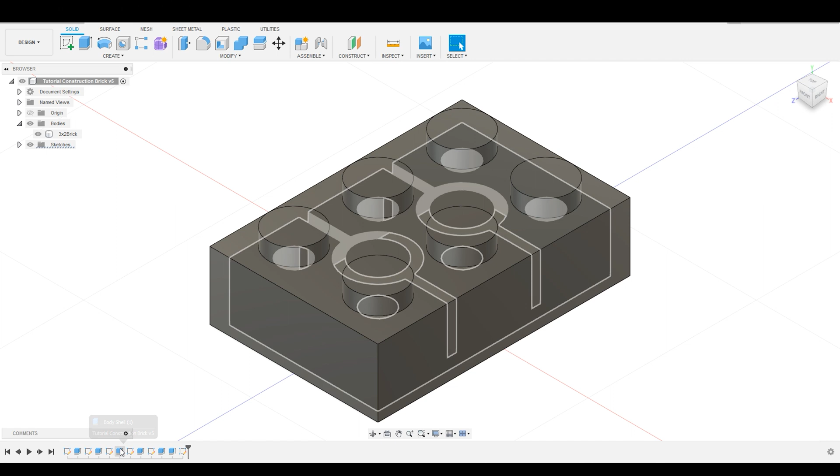Now, before we dive in, there is one thing that I did off screen that I want to tell you about, which is go through and name the features on the timeline. So you can see as I hover over them, they do light up in the workspace, but they also now have a name: body shell, peg, guts. It doesn't really matter what you name them, but especially as this timeline starts to get longer and longer, it is really helpful to go through and name your parts. So as you start to scrub back and forth and you're adding features and you're changing features, it makes your life a lot easier. Now, let's dive in.

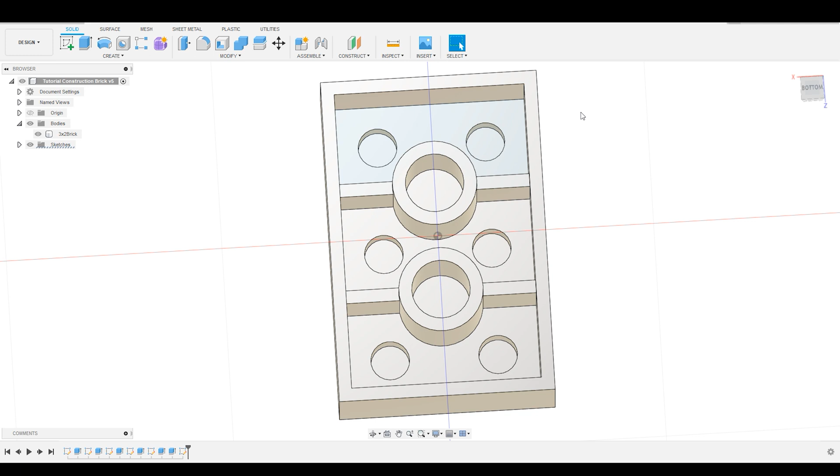So when we last left off, we had created the primary geometry of our brick, and we had added some extrusion ribs to help support the interior and to connect to the pegs. There are a few additional ribs that you would see traditionally on a construction brick perimeter to hold those pegs together. We did not model them yet. We could have modeled them in the same sketch, but there's some new things that I want to show you here. So let's create a new sketch, and it's going to be right there.

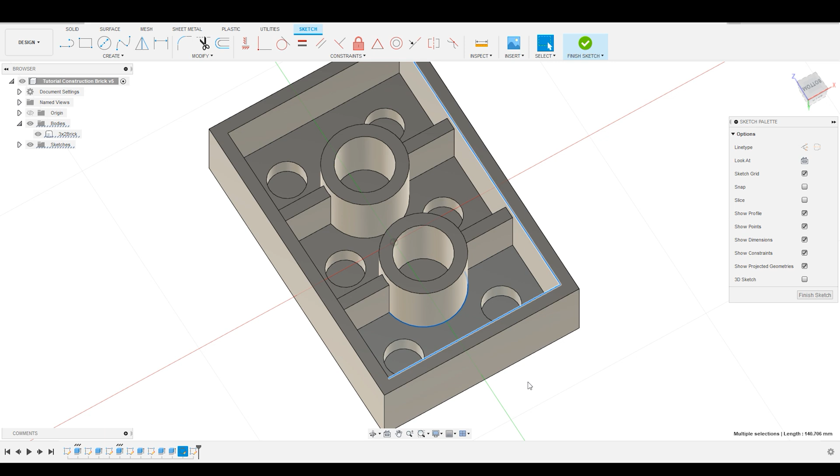Now, that is going to snap us to the bottom plane where we're sketching, and we want to pull a little bit of reference geometry. So hold down the shift key, middle mouse click to rotate. I'm going to grab this edge, and this circle. Actually, I don't want to grab that circle. Let's grab the interior circle. And then I'm also going to grab from this side the two pegs. Now this is, like I said, a little bit repetitive because we've already done a lot of this work, but go here and project, and hit OK.

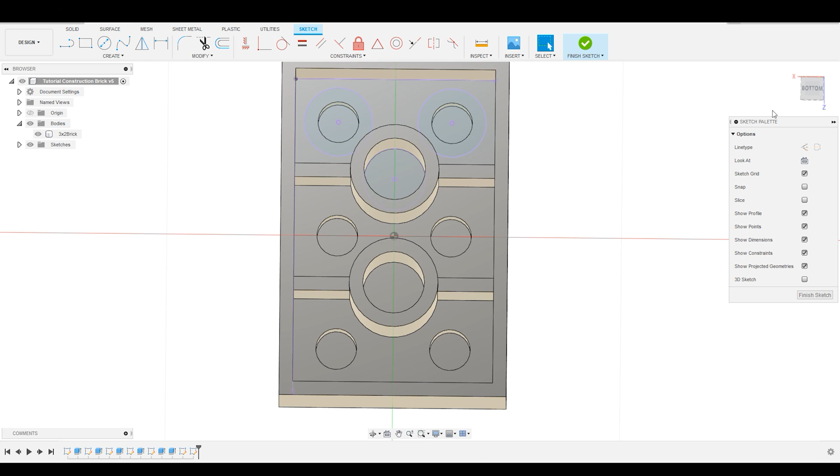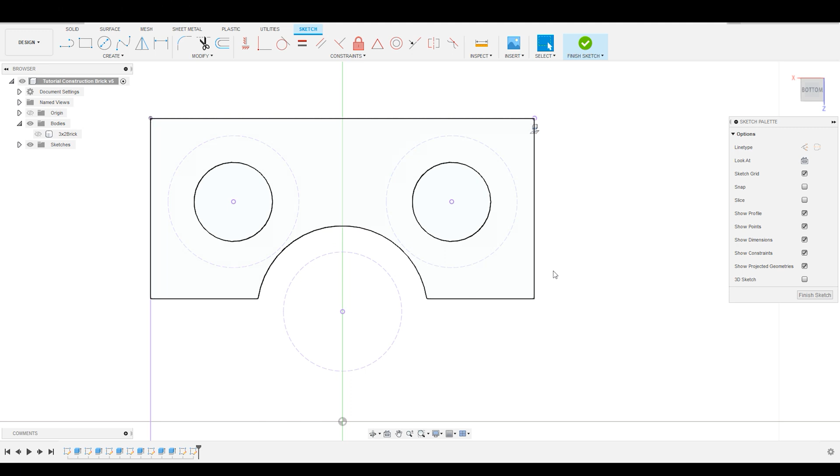Now we're going to go to the bottom to square everything up and zoom in, turn off the body so it makes everything a little bit more visible, and we are good to go. Okay, now let's go ahead and select all of this stuff, and we are going to turn it into construction geometry because we're not actually going to be using it for any type of modeling purposes. And let's start drawing in those corner ribs.

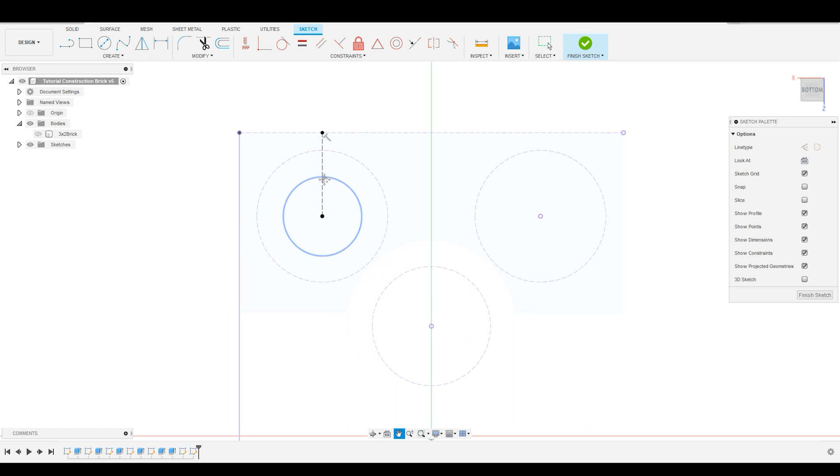So thinking about how we can constrain things geometrically before we constrain them dimensionally, I know that the ribs are going to be coming from the center of this circle. So first thing I'm going to do is draw a line straight up from the center of the circle, snap it to the top and hit escape to leave that tool. Switch this to construction geometry. I'm going to zoom in a little bit just to make sure that we're focused.

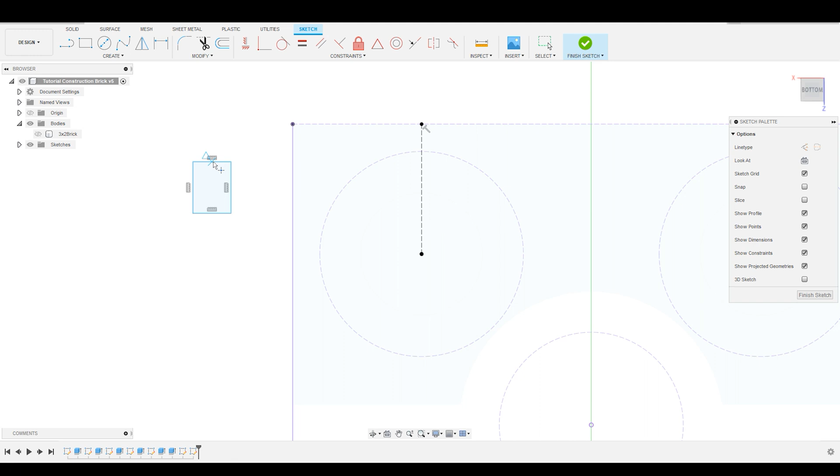Okay, next thing I'm going to do is create my rib. I'm going to do that with a rectangle. And what do I know about this rectangle? Well, I know that the top edge is going to be constrained to this line, and I know that it is going to be centered along this vertical. So the easiest way, I think, to do that in a single constraint is to add a midpoint to this top edge, hit escape, and then constrain that midpoint to this endpoint, hit coincident constraint, and now they are snapped together.

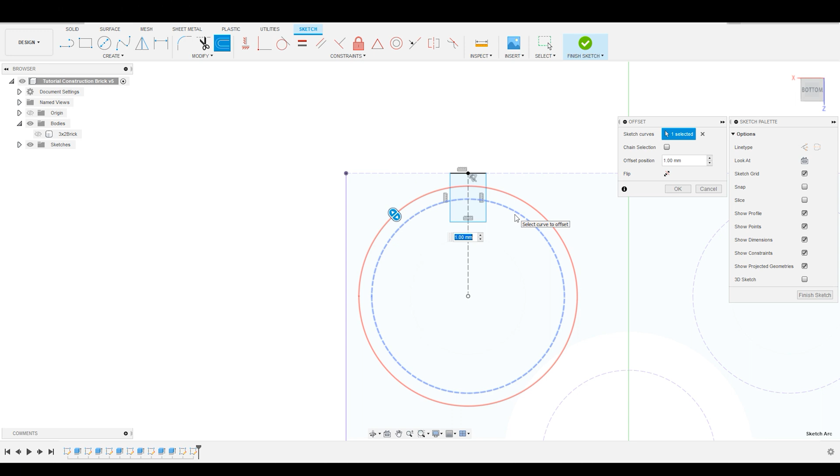The next thing that I'm going to do is create an offset circle around this peg. Similar to the big center peg here, remember we need to create some type of tolerances for our 3D printer or our CNC machine or whatever it might be. So I think I used 0.3 as my interference fit tolerance. Hit escape, convert that to construction geometry. And now, what do I want to do here?

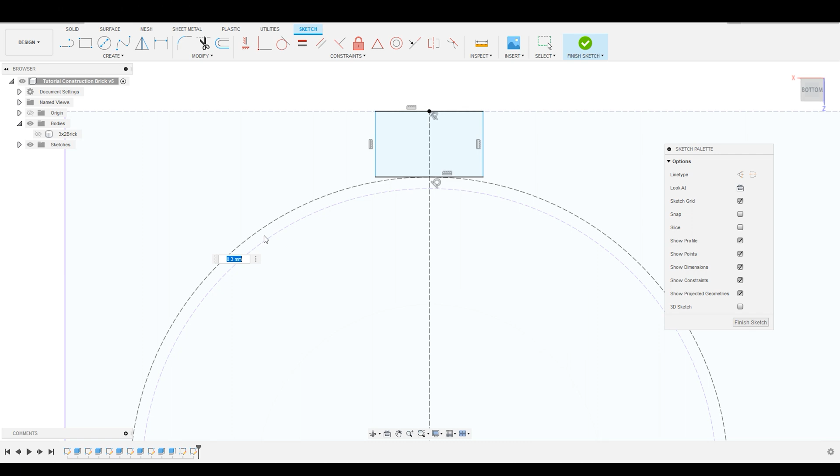Well, now I can use that tangent command to constrain this edge of the rectangle to this circle. So I can select both of those, hit tangent, and now you can see that this is tangentially constrained to the top. And the benefit of that is that if I were to go back and change that tolerance, let's say my bricks were fitting together too tight or too loosely, I can change this and it will automatically adjust. I'll do it a little bit bigger just so you can really see it. Okay, let's go back to 0.3.

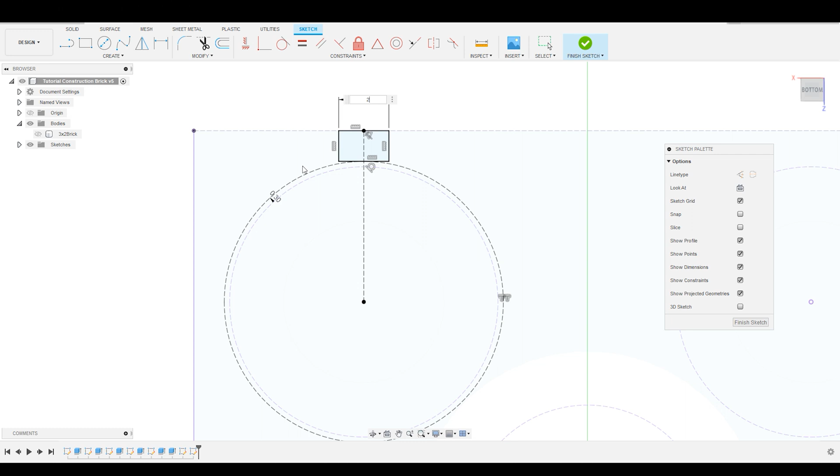Now we just need to constrain the width of this, and we are going to do that with the dimension. So only one dimensional constraint and 3 geometric constraints here. So let's do 2.5, looks good. I don't know what the official is, but this thing is pretty big anyway.

Okay, now we have one rectangle. So again, thinking about geometry, what do we know? Well, we know that it is going to be around the perimeter of this circle. So how could I mirror this? Instead of creating the geometry again, how could I mirror it?

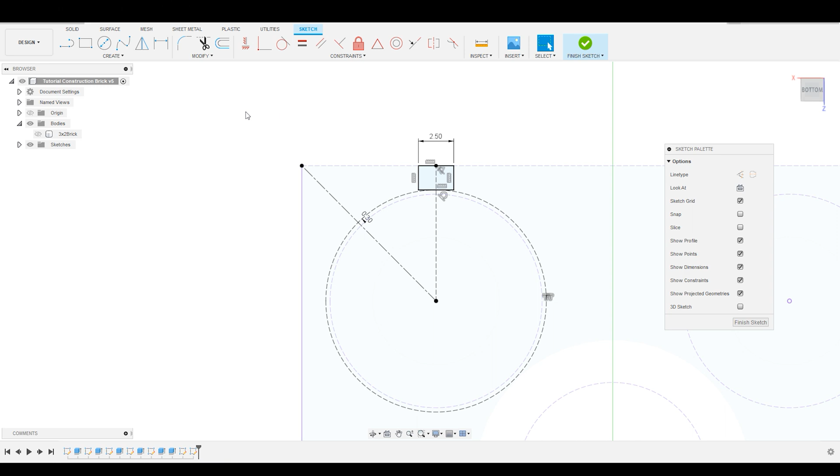Well, I know that if I were to set this line at a 45-degree angle, so coming out from the center at a 45, convert this to a mirror line, I could actually mirror across this. Now that's new. We haven't done that before. So far we've only been mirroring across verticals or horizontals, but you don't have to. You can set this mirror line at any angle and it will mirror across it.

So watch, if I hit the mirror tool, and now I select my object, you can see because this is the only center line in the sketch, it's already selected it. All right, and hit OK. Now, you can see I've got a rectangle here of the same dimensions.

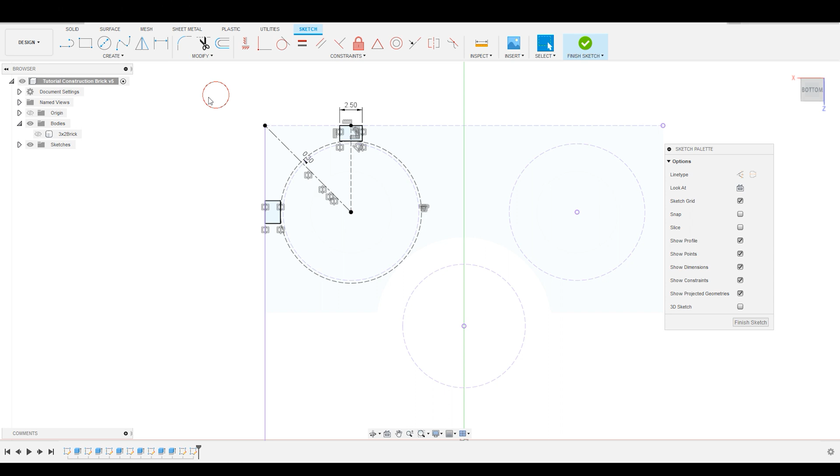Okay, why did I add this to my sketch? Well, it's because I want to show you a different type of patterning, similar to the mirror tool, but not exactly the same, and that is the circular pattern tool. So if I think about this brick, I know that I have 4 pegs. I'm going to turn this off for a second just so you can see it. I know that I have 4 pegs around this circle.

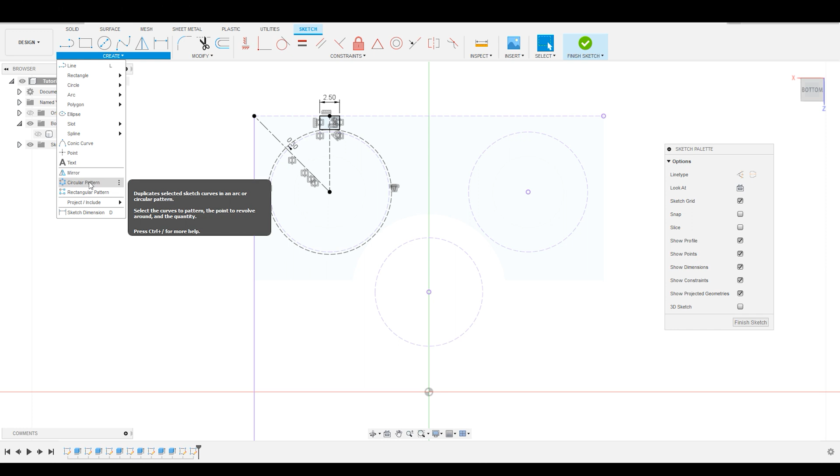So rather than mirroring them along a straight line, I can pattern them around a circle, and I can create those pegs at all those corner locations. So let's turn this body back off, and let's create the circular pattern tool so you can see what it does. First, it's going to ask me to select the objects. So I'm going to select all of these peg bosses.

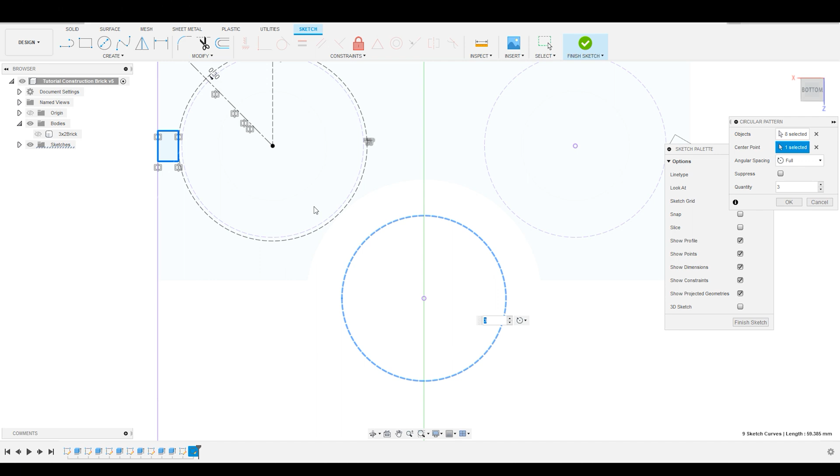Then I'm going to go to this. What is my center point? I can actually select a point or an arc. It will recognize either. And now it's going to bring up some additional circle pattern options. Okay, so the first thing it's going to ask me is my angular spacing. So do I want to go all the way around the circle, or do I want to go a certain distance? Maybe I want to do along an arc.

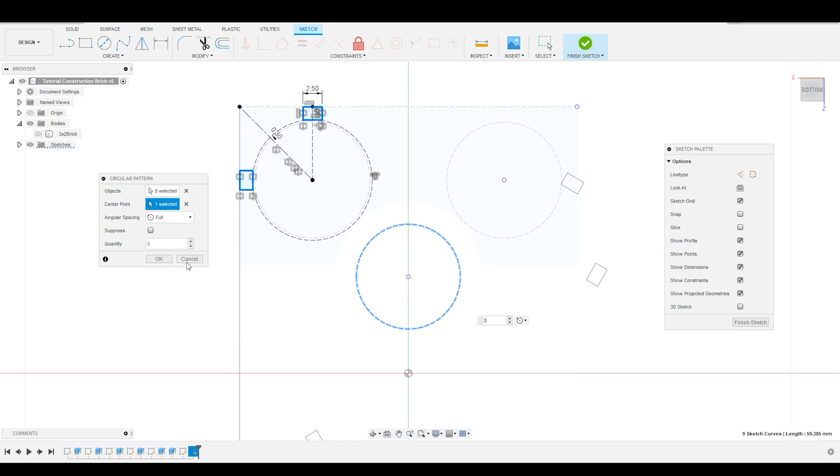I'm going to go with a full, and then it's going to ask me the quantity. Well, I want them at all 4 corners of this circle, so I'm going to click 4 and then hit OK. And as you can see, it has patterned this geometry around this circle. All right, and this is actually constrained, so I can repeat it, and I can also edit it. So if I needed more, I could add more. Not that I'm going to here, so I'm going to hit escape.

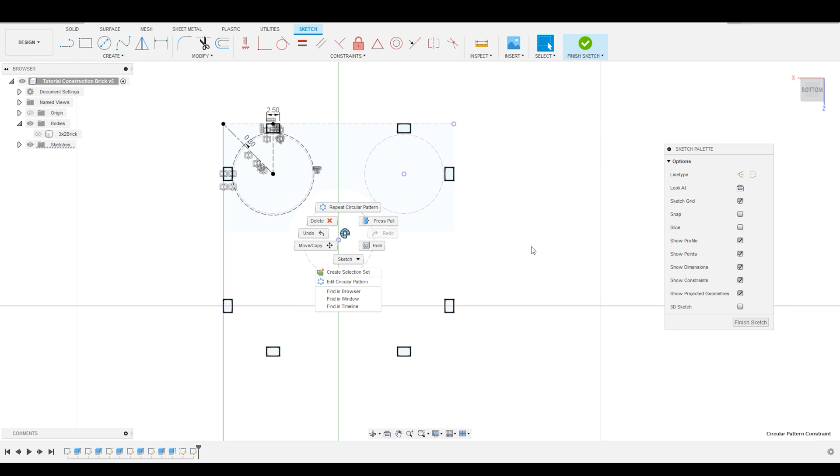But now you can see that I've got this pattern around the brick. So it will touch all of these pegs. Pretty cool, with only 2 little sketches. So using the mirror tool and the linear, and in this case it's called the rectangular pattern tool, but it works the same way, right? Really, really useful for quickly adding geometry to your sketches.

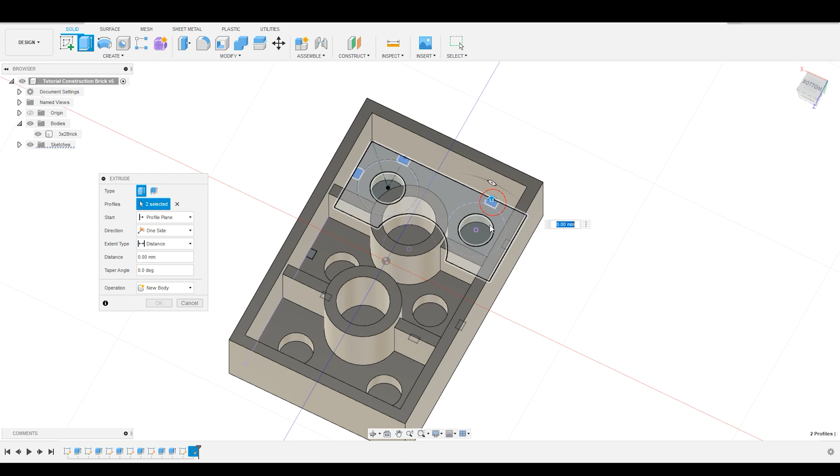Okay, and with that, we can finish this sketch and exit the view by holding down the Shift key, middle mouse key, and rotate. Okay, let's go ahead and extrude this. So hit extrude, and it's going to ask me for the profiles that I want to extrude. I'm going to get all of them. Okay, except these 2 over here. I actually don't need them. It was easier to have them in the pattern, but I don't actually need them all. So I'm going to ignore those.

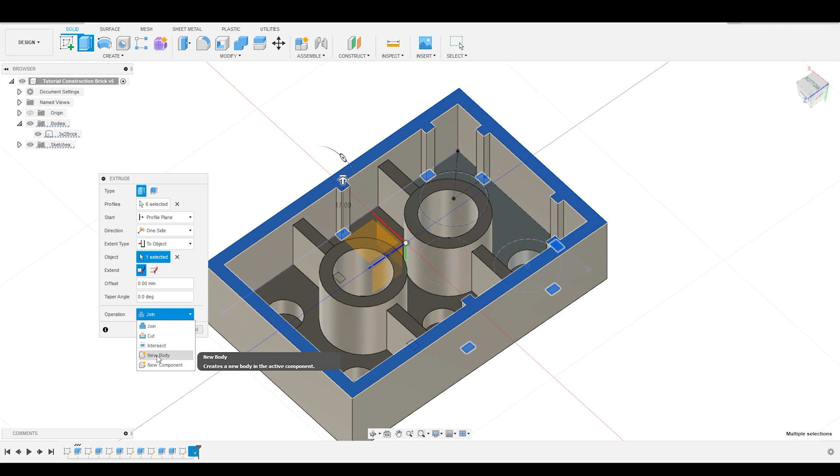Extent type is going to be set to object because I want them to come all the way up to this edge here. And there we go. Now, as long as we're doing this, I'm going to show you another tool. In this operation, rather than have it join to this body and become part of the main brick, we're going to go down here and select New Body and hit OK. And what you can see has happened is, in addition to the 3x2 brick body, we also have 6 other bodies.

All right, and it's kind of hard to see. So great, this is an opportunity to show you another tool. If I right-click on this body and go to Appearance, that is going to bring up the Appearance tab. And the Appearance tab is going to allow me to change what it looks like in the workspace. Down here, you can see there's a big library of materials that Fusion 360 has in as a default.

For something like this, I'm just going to use the plastics because I think that's pretty solid. And I'm going to pull up ABS (White), just the first one here. And I'm going to move it up to the design space. Now, by default, it is white, but by double clicking it, I can change some of the appearance properties, specifically the color. So I can come over here and I can drag the color slider over. Maybe I want it to be a nice bright green color.

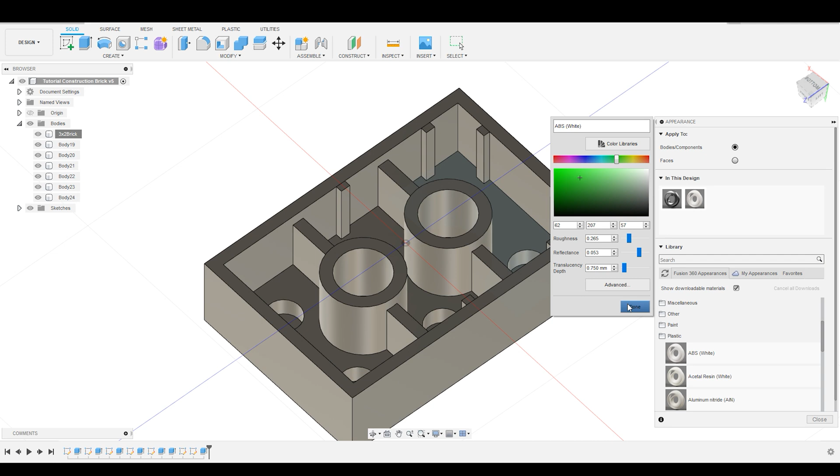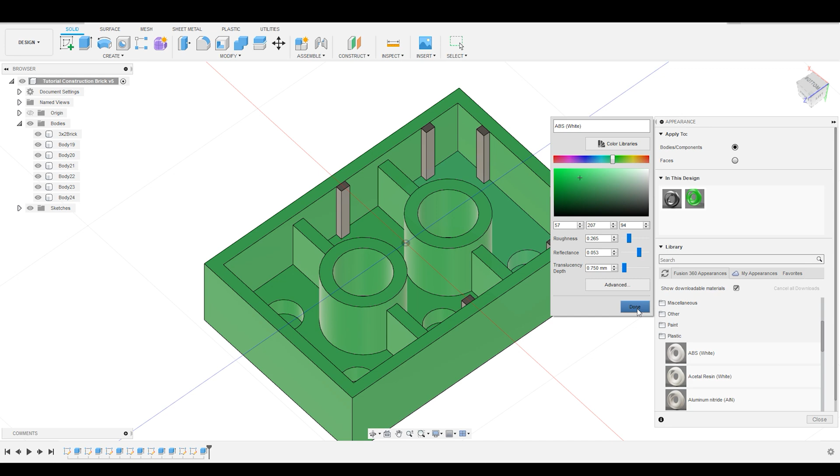And I can also change the roughness and the reflectance. That is not going to make a huge difference, in my opinion, in the day-to-day workspace. It makes a lot of difference if you are going through and rendering. So then I'm going to click Done. And then what I can do is I can drag this onto the body that I want to apply it to. You can see that the main 3x2 brick has turned green. That will update. So if I turn it to more of a blue color, it will turn blue. But we'll leave it green for now because I think that's a nice color. And hit Done.

Okay, now what we can do here, the reason that I wanted to keep those separate is because I wanted to show you how to do a mirror, not of a sketch entity, but of an actual body. So up here on the Create command in the dropdown, you can see we've got not only the Extrude command that we've used so far, but we can also mirror down here. So I'm going to click on mirror, and it's going to ask me what type of mirror I want to do. You can actually mirror a lot of different things: faces, features, features being like what we just did in extrude, so you can mirror that extrude to a different location. In this case, we're going to select bodies because these are separate bodies.

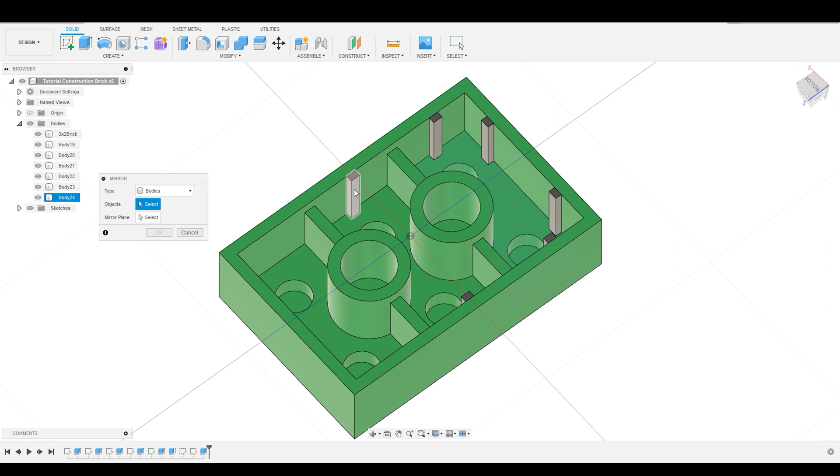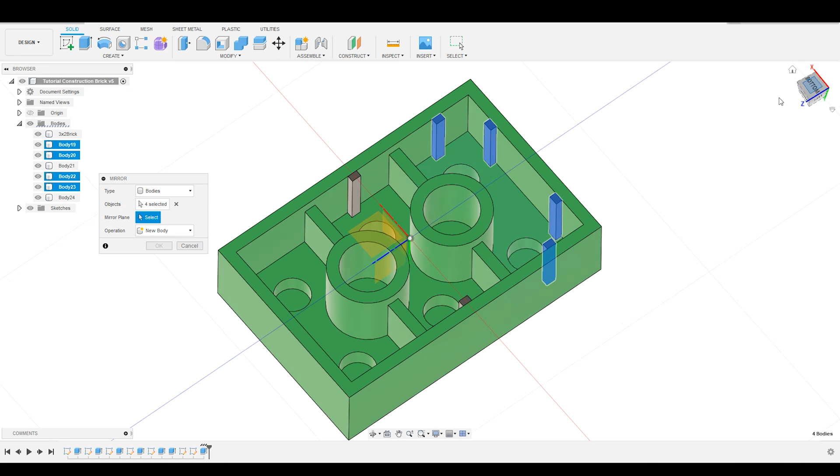And now it's going to ask me which objects I want to mirror. So I only want to mirror these 4 in the corner because I've already got one here and right here. I don't need them again. And next, it's going to ask me for my mirror plane. Let's pause here and think back to the very first sketch that we did. And what did we do? It was very important that we took the rectangle and we constrained it to the origin point here so that it was vertically and horizontally symmetric across the origin. Why is that helpful now? Because it's symmetric across the origin, I can use my primary reference planes as my mirror planes.

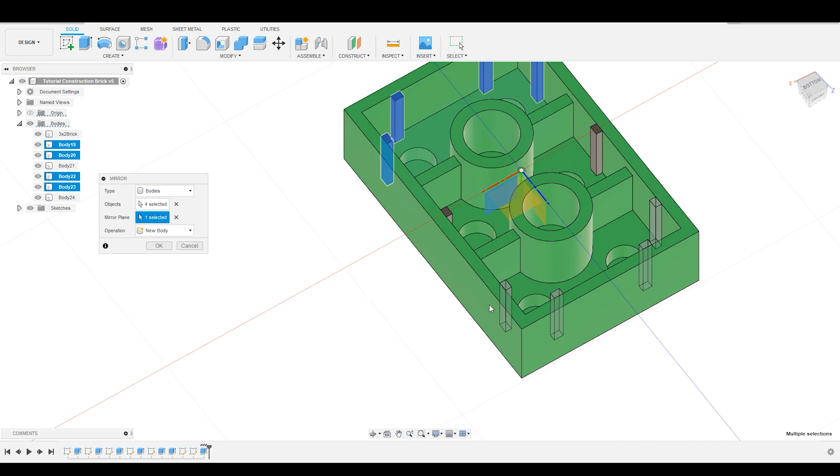So in this case, I'm going to use the XY plane to mirror across, and you can see that these ribs are now going to be mirrored to the opposite side, and it's guaranteed that they are going to touch this edge that I pulled from this sketch. And hit OK. Great.

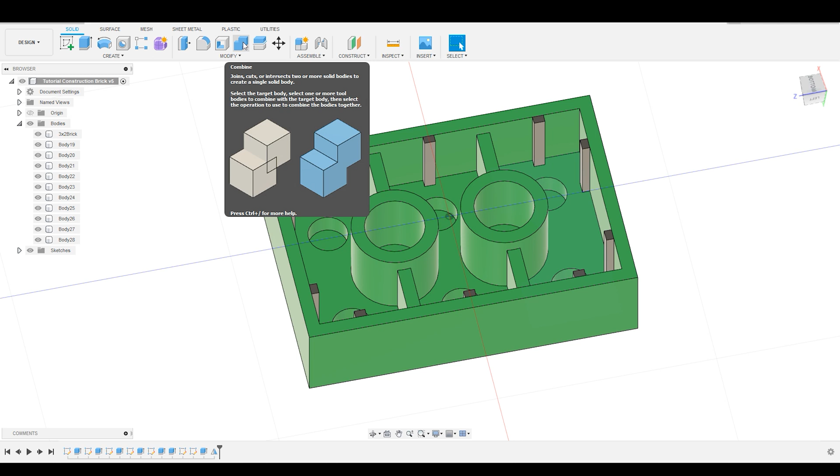Now that I've got all of my ribs laid out, I'm going to show you a new command called the Join command. So, or in this case, the Combine command. Different CAD programs are going to call it different things. Some of them call it a Boolean operation. Some of them have separate tools for combine, subtract, etc. But similar to how when we did an extrusion, we had the opportunity to join it to the main body, we can actually join separate bodies together after they've been created. So go up here and click Combine, and it's going to ask me the target body and the tool bodies.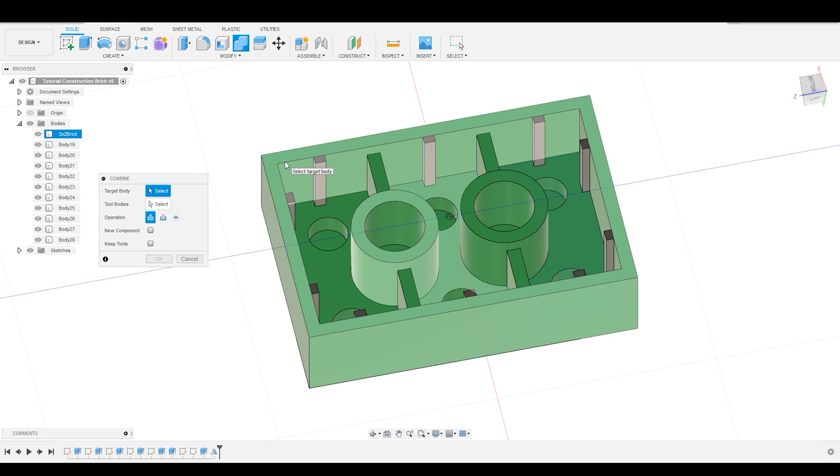Okay, so as you can see, one is singular, one is plural. The reason is that basically one is what you're going to use as the end result, the thing that you want to end up with, and then the tool bodies are the things that you're going to be using to get there. And that doesn't sound that important. It will make more sense when we start to subtract bodies. So I will show you this again. For joining, it doesn't really matter, but we're going to use the target body as our main body, and then our tool bodies are all of the ribs here at the corners.

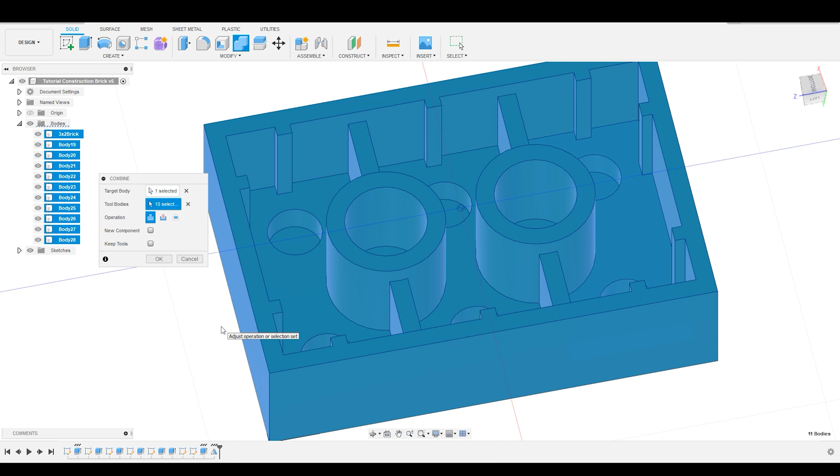And you can see that they change colors as they are joined, and also it loses the line over here. So we've got 9, one more to go. There's 10. One of the things it's going to ask me is whether I want a new component, and whether I want to keep the tools. If I don't keep the tools, they basically become merged with the original body. If I keep them, they're still going to be merged, but as a duplicate, so you'll still see all of these in the feature tree. I'm going to not check that, hit OK, because I want it condensed back down to that original 3x2 brick.

So we have a brick with all of our ribs around the corner. I think for today, we are done extruding, now that we've seen some of these additional options.

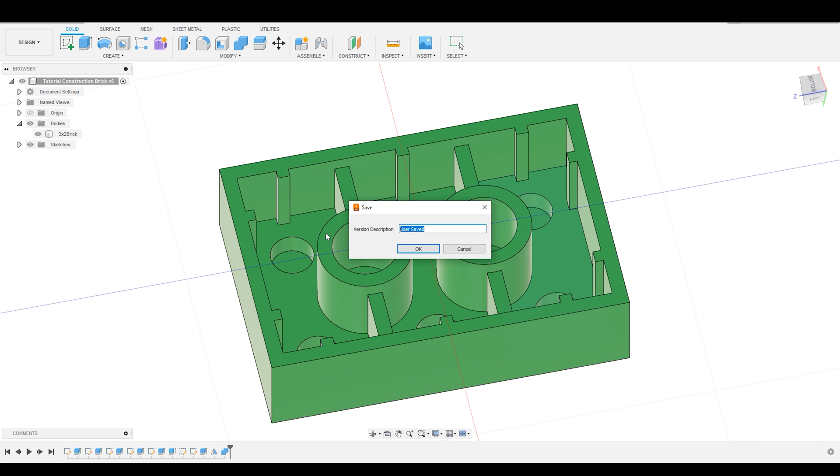So next up, let's start doing some additional modification, focusing here on the Fillet command. Oh, pause for a second—hit save, we have not saved in a while. We're going to call this V6 in my case. I'm going to have a lot more versions than you do because I've been doing these tutorials as a dry run and then going back and recording them. So you probably don't have that many saves, but maybe you do. Remember to save often.

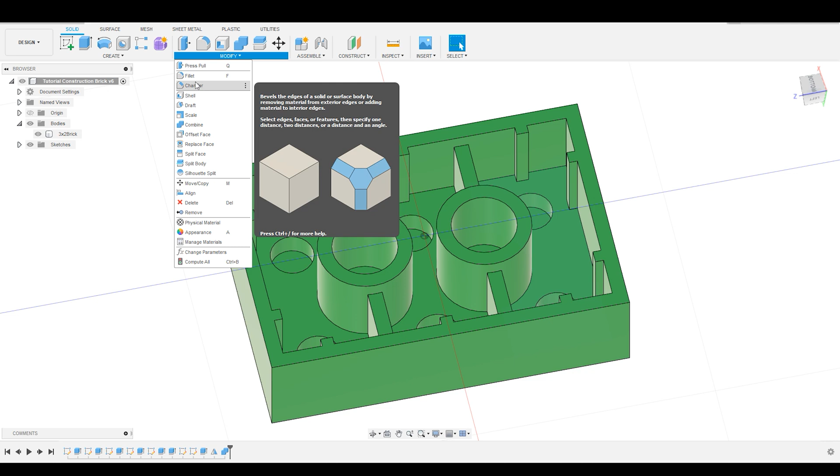Okay, now what we need to do is introduce the Fillet command and the Chamfer command. Some CAD programs will actually have them as part of the same tool, but with different options selected. In this case, they are separate tools. So you have the Fillet command, which is a rounded corner, and the Chamfer command, which is a hard angular corner that you can add to things. The first thing we're going to fillet is the edges of all of our ribs.

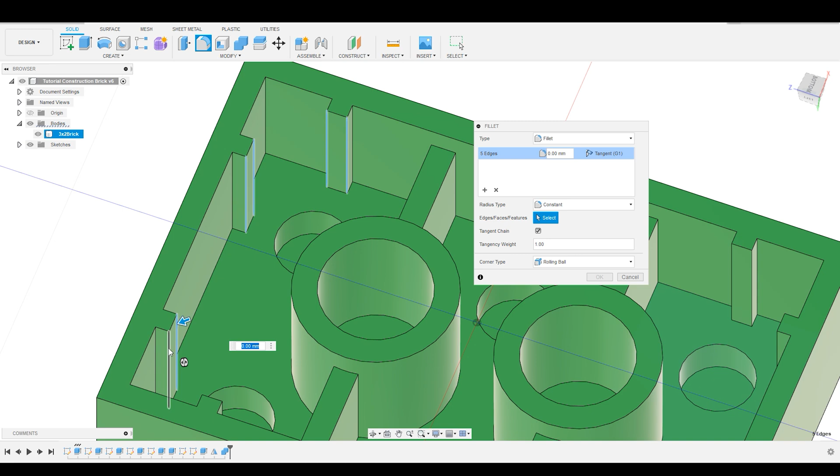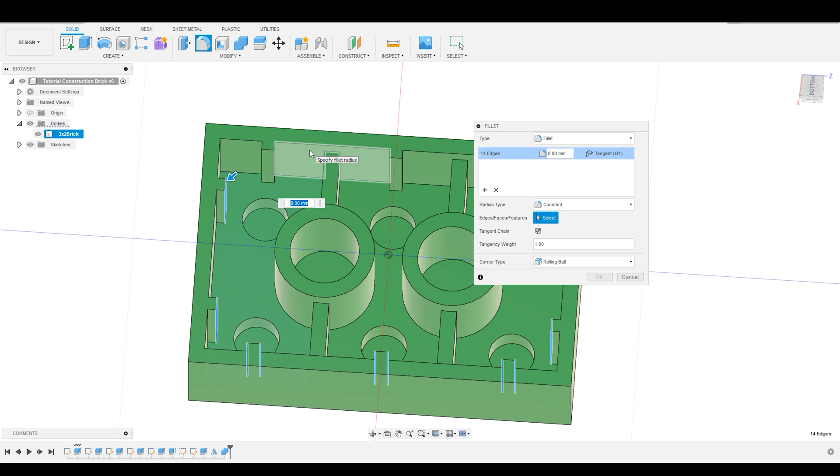When you select the Fillet command, it brings up the dialog box, and the first thing you do is start selecting the corners you want to fillet. You have two options: fillet a face or fillet a corner. I'd say 9 times out of 10, I select edges, because I want a little more control, and it's easier for me to visualize what's happening in the plane and space. There are definitely instances, especially working faster, where I'll just go ahead and fillet everything, but a lot of the time I'm filleting edges selectively. As you can see, as I select them, more edges are being added to the dialog here.

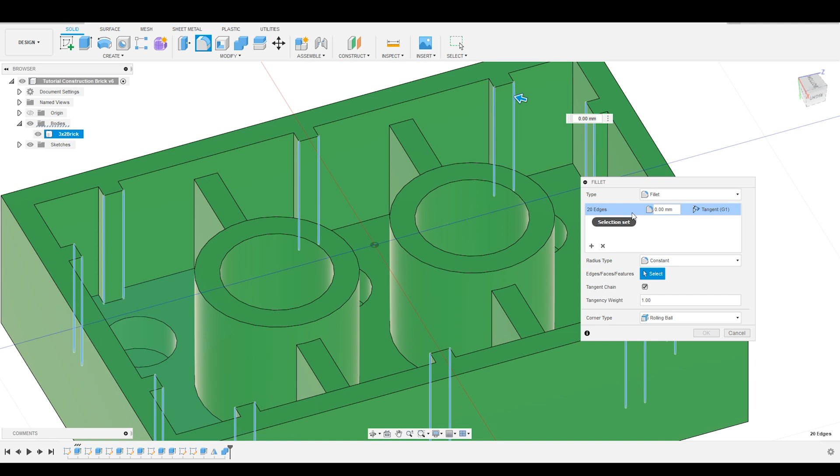Now the default value is set to 0, so you need to add some value. Let's start off with 1—just hit 1, and you can see it's created this rounded corner. Before you hit enter on this command, you can push and pull this to see what different sizes would look like. That's really cool, and you can adjust that on the fly. This handle—now I want to point out one thing, there are two different handles here.

One is the arrow, which lets you adjust the fillet radius itself. This one lets you change the tangency weight. We can talk about tangency weight at a different time—by default it's set to 1. We'll come back to that. There are reasons to change the tangency weight, but for a beginner tutorial you don't need to know anything about that. We're just focusing on the radius of the fillet.

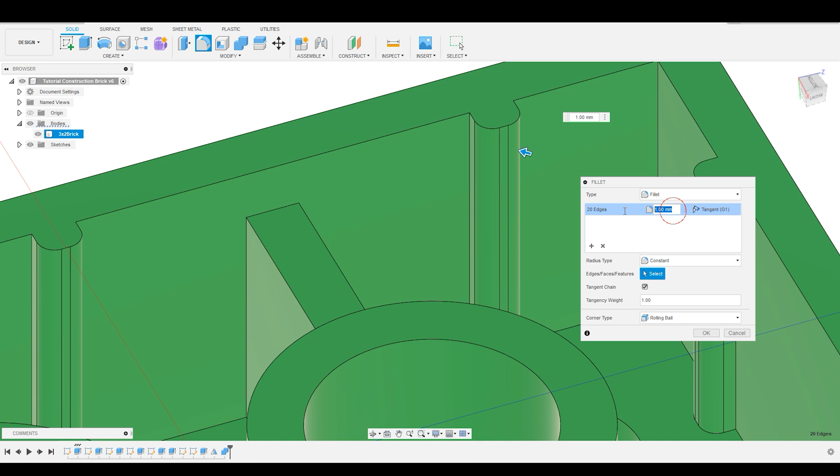So let's change that—we know this diameter, or distance, is 2.5. If we change the radius to half of that, 1.25, that's going to essentially give us a full round fillet, since the radius is half of the diameter. You can imagine this is the diameter of a circle, and that's going to give us a nice, smooth, full round radius. Now we have our first radius down here in the feature tree, and I'm going to rename this—I'll just call it the rib fillet.

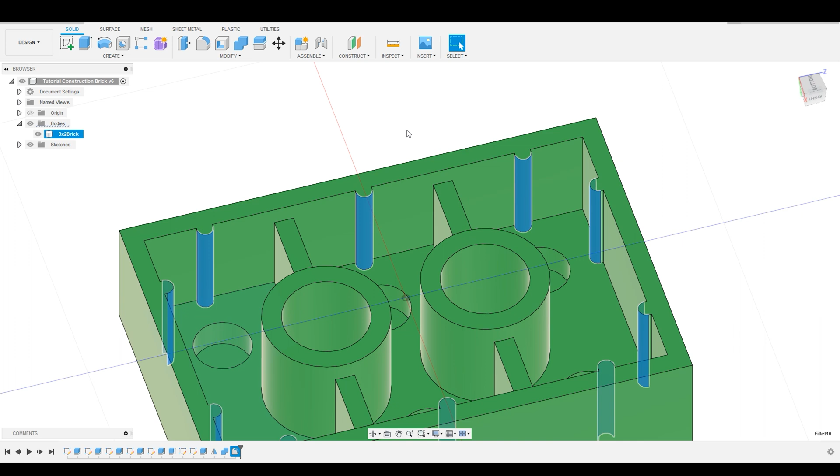Okay, great, now let's continue on our radiusing journey. We're going to create another radius—I'm going to flip this little guy over, and create another radius that does all of the corner elements. So let's grab all of these edges here.

And I am going to grab these, and let's set this to, we're going to make it a little bit smaller. Let's set it to 0.5, so it's just a nice, small, tight radius.

One thing that's kind of interesting is when you look at objects in the environment and you're modeling things, even things that look like they have sharp corners generally have a very small radius on them. That can be from manufacturing tools starting to wear down over time, or your 3D printer having a little bit of roundness to the print, or whatever it might be.

But if you're doing this 3D modeling for a really high quality resin printer, or photography, or digital rendering, it's always nice to add really small fillets to things because it helps the camera or the computer capture the light as it hits the edges.

So it's not super, super important to add a fillet to every single little thing, but if you are trying to render things and make them look really nice, adding some small fillets on the corner are definitely going to help.

In fact, when I did the thumbnails for this video and part 1 and 2 earlier on, I added some fillets before I rendered those out so that you could see them.

Okay, now let's say I want to add some additional edges to this, or I forgot an edge. I can go back and edit this feature. And with this selection set up, this is a little counterintuitive. You can hold down the Control key, and it will actually allow you to add or remove edges from that selection. That's a little bit odd in my opinion because everything else you hold down Shift to select multiple things, but for this you hold down Control.

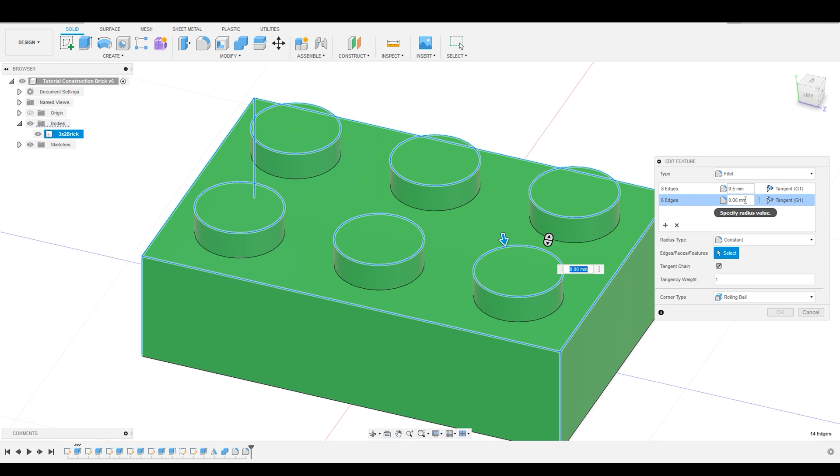And the other thing that you can do is you can actually add additional features with different radiuses to the same fillet command. So if I add to this selection, I can now go in and select the tops of these circles, and set those to be a different radius. Let's just say 1 by default. You can see now this is part of the same command technically, but it is a different radius.

People have different thoughts on this. Personally, I do not like to have multiple selections as part of the same feature unless I'm just trying to create a different radius on essentially the same edge. The reason is because if I'm going back and editing things, I like to be able to identify what's where.

So it's really easy for me to say, okay, hit OK, we're going to go in and rename this. I'm going to call this the outer edge fillet. And then I want the peg fillets to be their own thing.

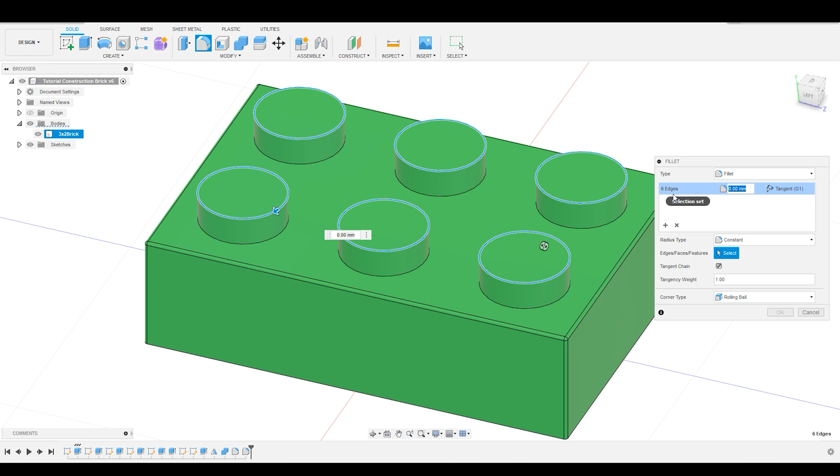There's reasons why you would want to combine them, and I can show that to you in a different video. But for basic things, I just like to separate them out, because yes, this feature tree does become a little bit busier, but I really like to be able to see what the fillet is for and where. Let's go with 0.75 for the top of the peg.

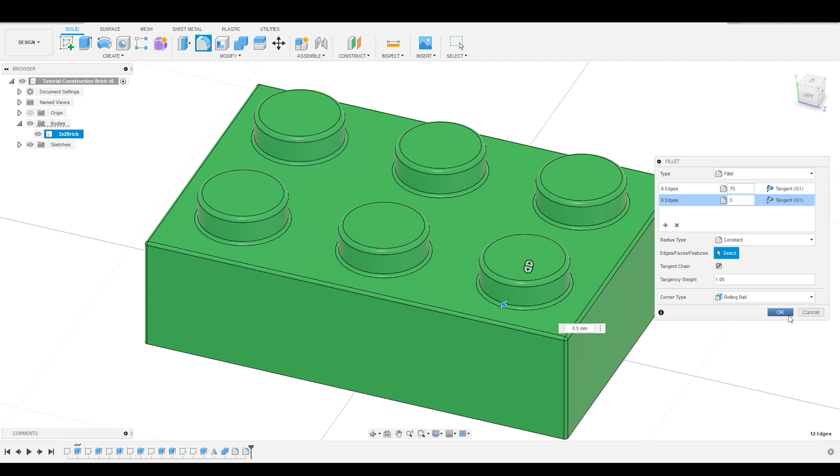And we'll break our rule here, and we'll just add the bottom peg fillet here, and I'm going to set this to 0.5, just slightly smaller. You can kind of see that in real time. I think that looks really nice, and hit OK. We can rename this and call this the peg fillet.

Okay, great. Now there's a couple of other things that I want to fillet. Let's go in here and add some fillets to the internal geometry. Now let's say I want to go in and fillet these edges. This is actually a lot of edges to try to select, and I want to show you something.

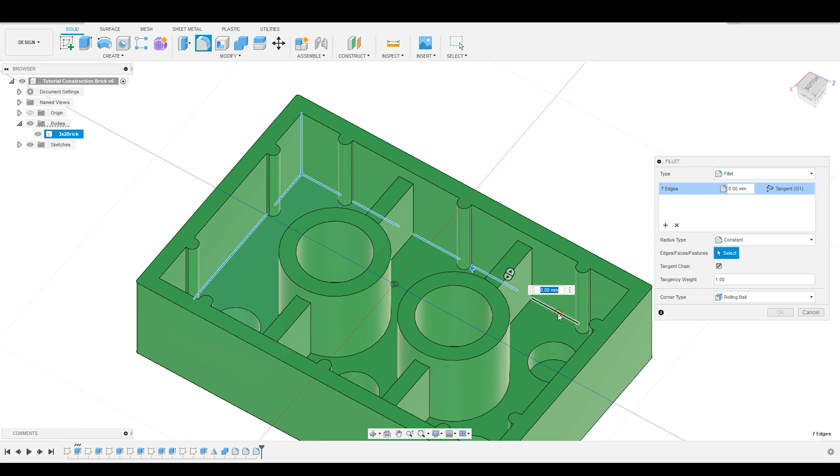So let's cancel this because this is a lot of edges. Now, remember in the last video, we scrubbed backwards in our timeline so we could place features before other features. So I would have a lot less edges to select if I filleted this edge before I joined these additional tiny little ribs in here. So let's do that. Let's scrub back on our timeline to before that union.

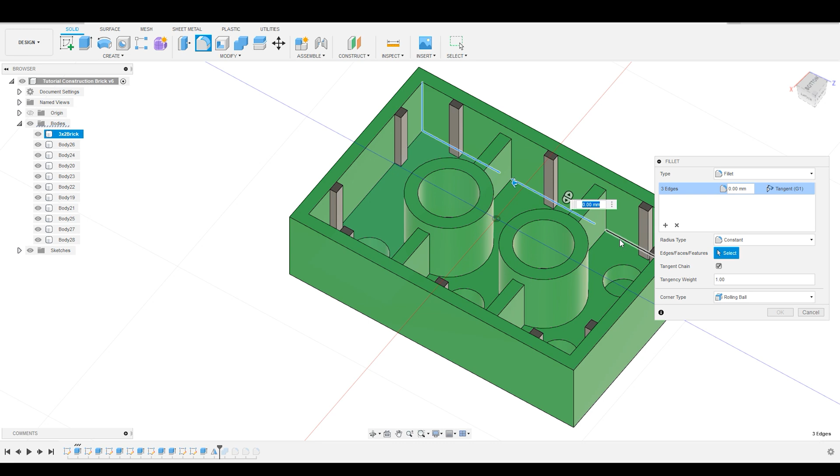All right, so these are now separate pieces. Let's go in and add a very small fillet to these edges. You can see now it's got that entire edge. That makes my life a lot easier, that's like 10 less edges that I have to go through and select.

And then let's also go in and, talking about faces, let's go ahead and select these faces as well.

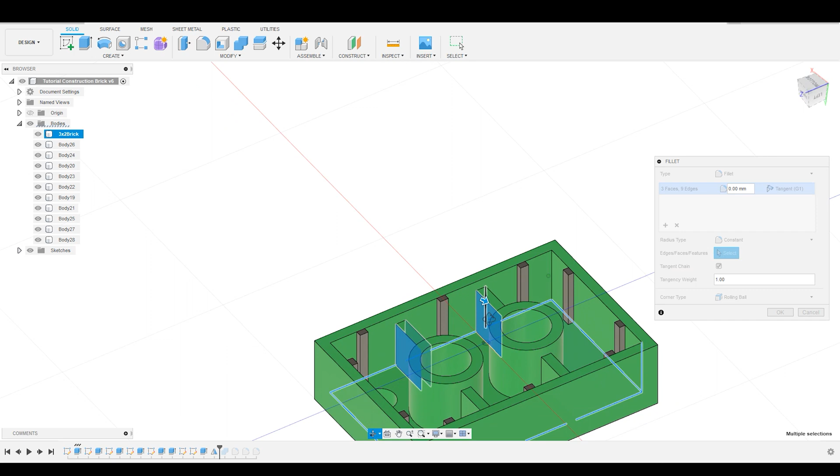Whoops, ignore that.

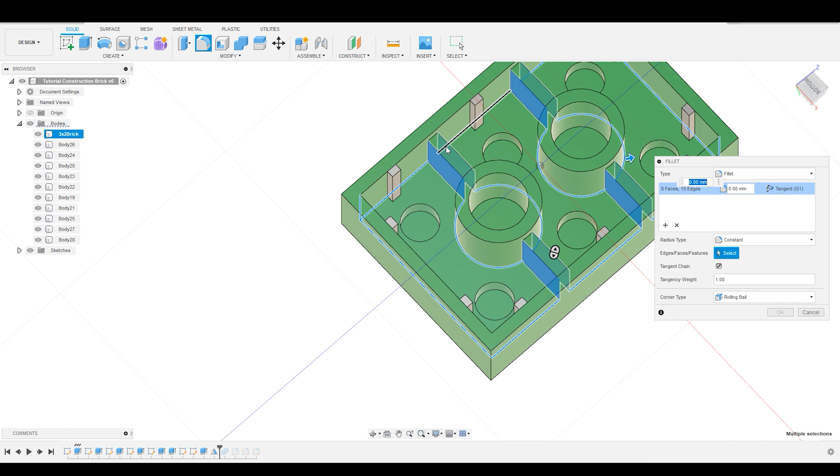Just going to select all of the edges around the perimeter and the faces of these upright support ribs. I know there's a lot of rotating and zooming, I apologize for that. There we go, so we've selected all of the bottom edges here, the interior sidewalls, and these faces. We can grab the tops of these faces as well, if I can grab it.

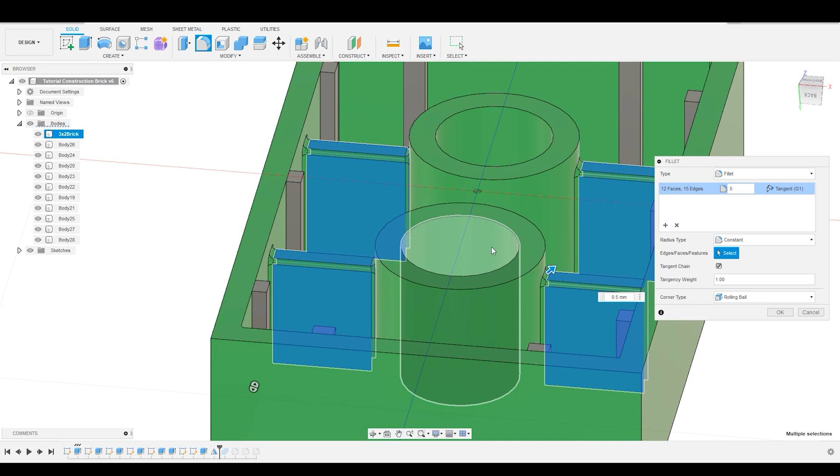Let's just make that a very small, like 0.5. You can see it's a nice little small radius. Hit OK, all right, great.

So now you can see I've got a nice radius on the inside. Oops, and I forgot one, so I need to go back in, hit Edit Feature, Control, add this edge, hit OK. Awesome, now watch what happens.

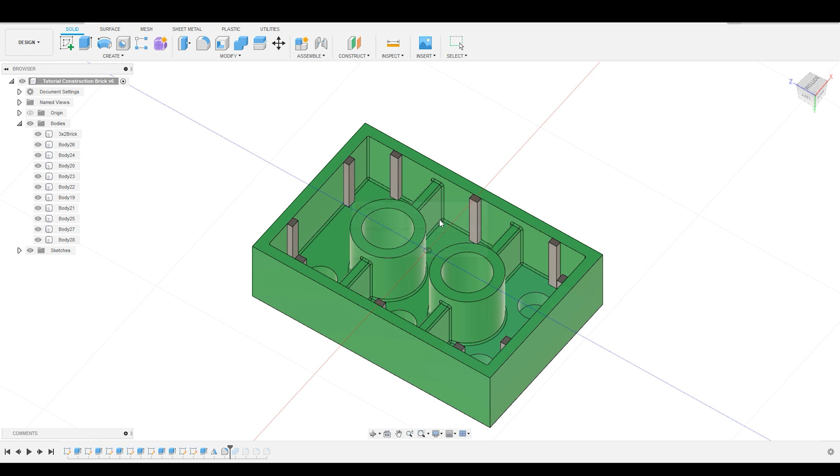Let's save real quick. Hit OK. All right, and now when I scrub forward and join these together, you can see that this edge now goes all the way through, but it still gives us this nice hard corner here that we can now add our next fillet to.

So I'm scrubbing forward on the timeline again, one more step. So you can see we've got these nice rounds here. Very cool, all right, great.

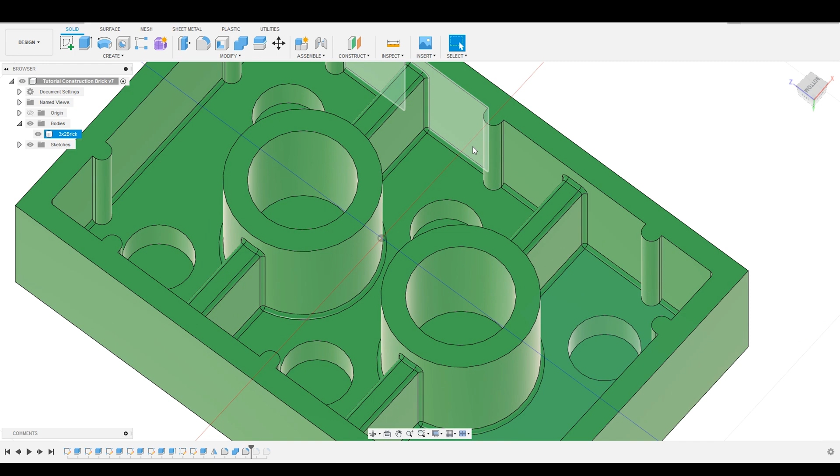And we're going to keep scrubbing forward all the way to the front. So just thinking about it in terms of modeling in real time, when we don't have pre-dimensioned sketches to start with, we can go back and forth in the timeline, and the order of operations in which you develop some of your sketches is going to be really, really important.

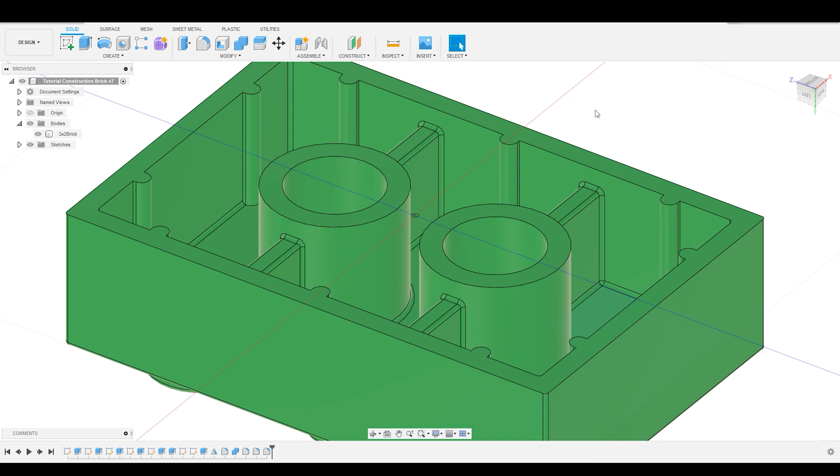Now, next thing we're going to talk about is the chamfer command. The chamfer command works the exact same way as the fillet command. I'm going to chamfer this edge here and this edge here, and let's just start this off with a 1 millimeter chamfer.

By default, the type of chamfer is going to be an equal distance, right? So that means the distance this way and the distance this way, so the rise and the run of that chamfer are going to be the exact same. The other two options allow you to adjust that. So two distances or distance and angle essentially do the same thing, it's just how you put in the variables.

So two distances, right, the rise, so that's this one, you can see it by the active area. Let's increase that to 2. All right, and that looks good.

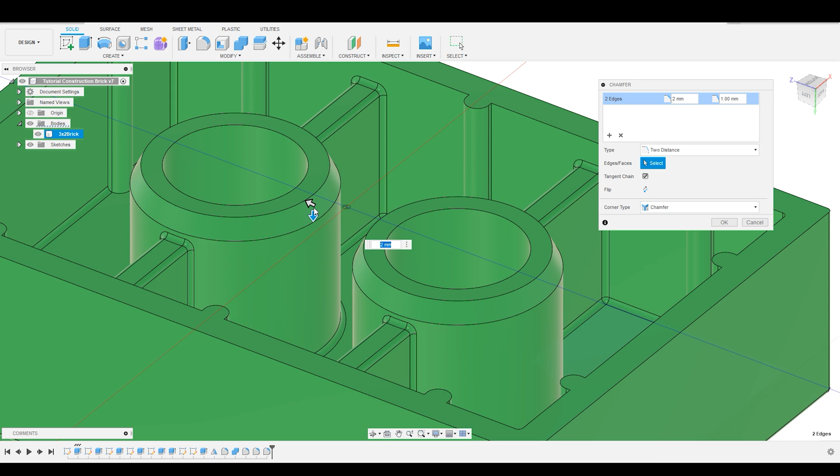So essentially that's a half of a 45-degree angle, so 22.5-degree angle. I could do the same thing by going that way, right? So you can see 26.2, I guess my math was low. All right, so I hit OK, and there we go, we've got a nice little chamfer there.

I do want to add one more chamfer here before we call it. I'm going to add a nice little chamfer around the bottom edge here, and that's going to help us pick up our bricks or pull our bricks apart. So let's create a new chamfer here, and I'm going to select around this edge.

Now, one thing that's kind of cool that we haven't shown you yet is the tangent chain, right? So if that's turned off, it's going to select all these edges individually. If I have tangent chain selected, it's going to do exactly that - anything that's a connected chain will automatically chamfer.

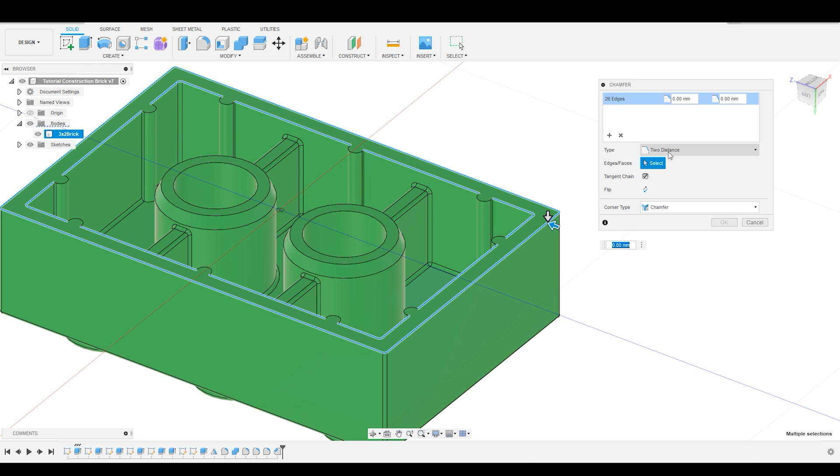All right, and these are actually a little small, so they're not going to do it. I'm going to select all the way around here, and I'm going to go back to equal distances, and I'm going to take this to 0.1. That's really small, that's maybe a little bit too small.

So let's go edit feature, and let's go 0.25. Cool, that's just a nice little edge chamfer that's going to make it easier to separate our bricks if we were to actually construct this. And that is looking really, really awesome.

I think this is almost a finished brick. Let's add, just for giggles, let's just add a slight little chamfer around all of these edges here. All right, so let's just do like 0.25, very, very tiny, but just gives us a nice little visual.

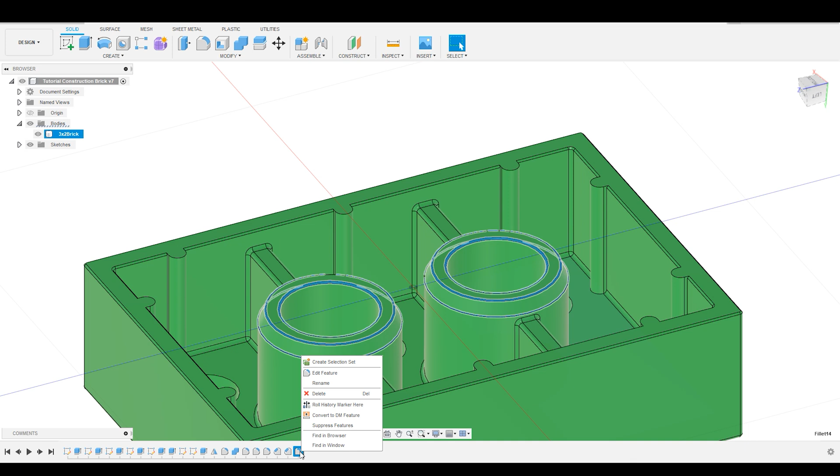And heck, let's add to this. Let's go ahead and add - can I do it? Oh, forgot, hold down Control. Let's go ahead and do these edges too.

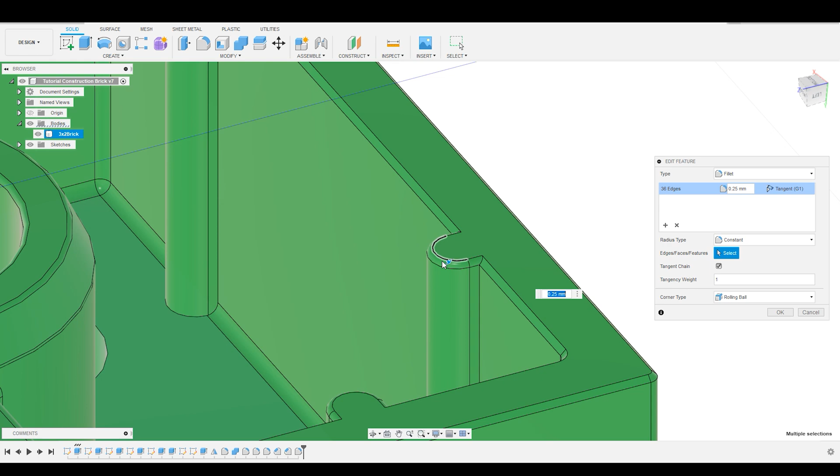We're going crazy with the chamfers, but that's okay. Might as well get some practice in. All right, and as you can see, it's got a nice little chamfer here. I'm sorry, a nice little fillet here, just around it. I think that's going to help smooth the entry into and out of the brick. We could have done that as part of the chamfer command as well, but not a huge deal there.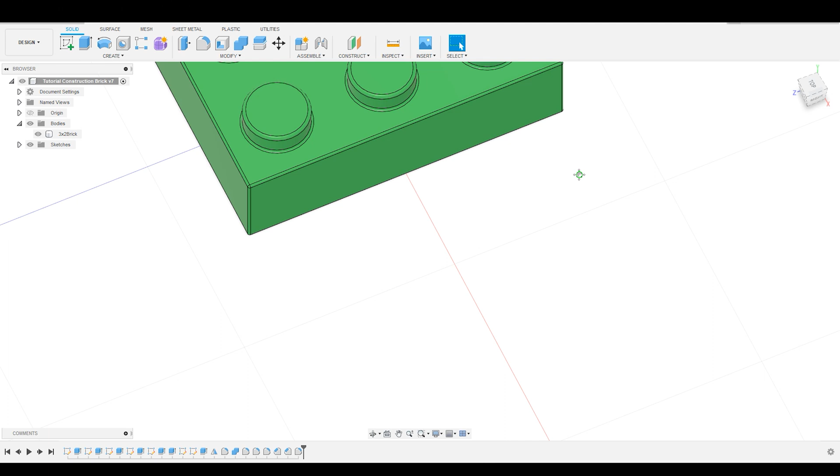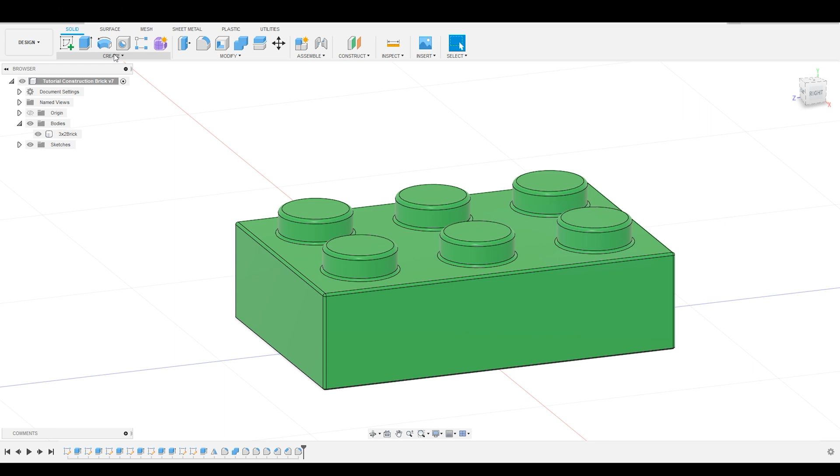All right, great. So now we've got this really nice looking brick. But now that we've got some finished bricks, we've got to stack them up. So there's one more command I'm going to show you before we end this tutorial, and that is the pattern command. So we did a pattern as part of our sketch. We can also do, similar to how we patterned and mirrored both sketches, entities, and bodies, the same thing with actual geometry. So let's go down to the Create menu, and we are going to Pattern.

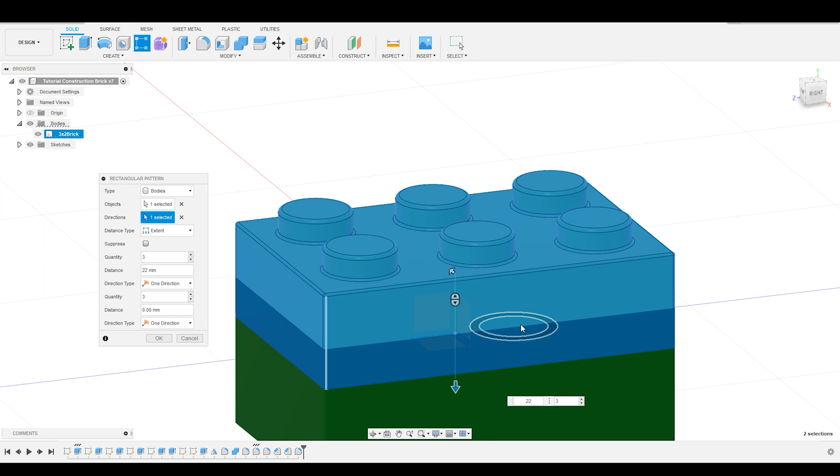We're going to do a rectangular pattern. Bodies, what objects do I want to pattern? Well, obviously my one really cool brick. Direction, you basically just have to select an edge, right, or a line, and it'll show you what direction it's going to go. Okay, and now the distance, let's set it at 22. I'm going to go further. Opposite way. Oh yeah, there we go. And let's do 2.

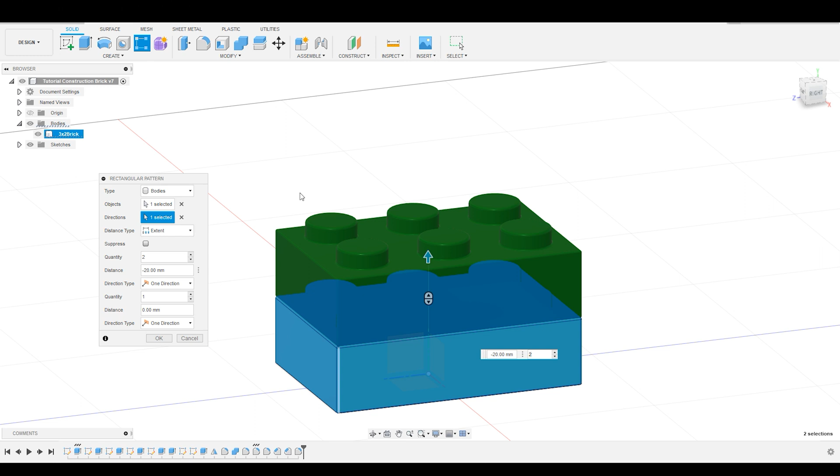Okay, look at that. And now we are going to stack up our bricks. All right, so you can basically change the number, the distance, and you can actually select multiple directions. I'm just going to do one direction. If you set 0, select that to 1. Okay, and then we hit OK, and now you can see it's created a separate brick.

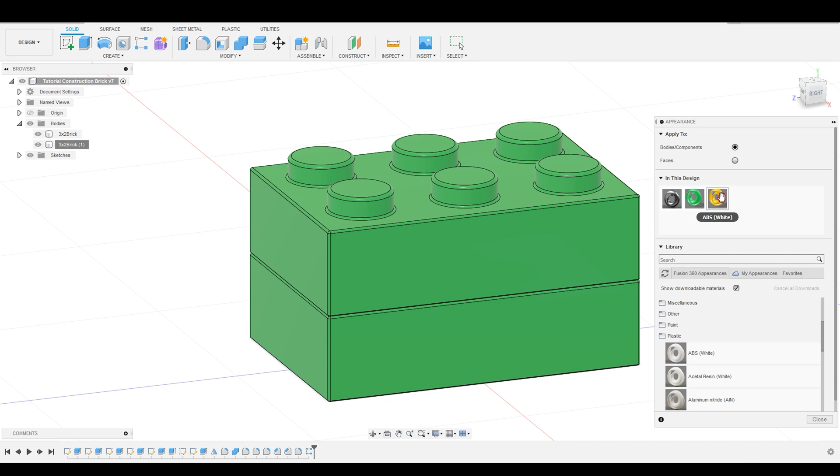Doesn't look super interesting because they're the same color, so let's go into our appearance menu and expand that. And I'm going to drag up the ABS again. I'm going to make it a cool orange color. Done. And I'm going to now drag this to my other brick. And there we go, we've got some stacked up bricks.

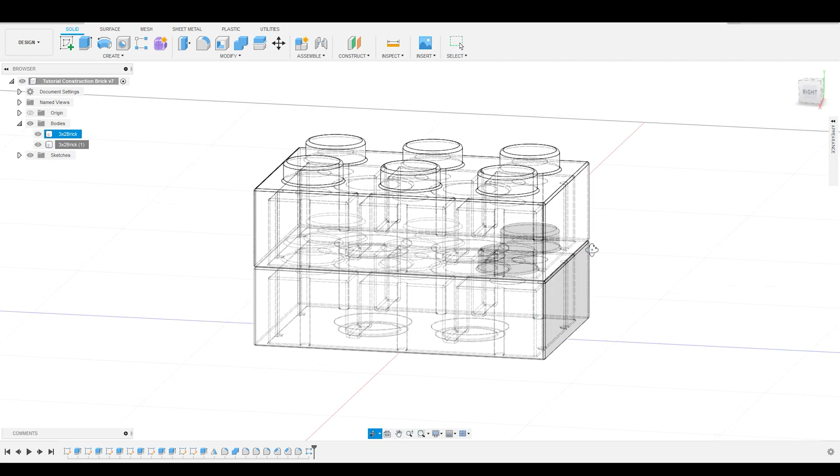And I can look at this, and you can't really see all of the cool stuff that's going on. So the last thing I will show you today is an evaluation tool. So we've already gone and shown you how to change the visual style to wireframe with hidden edges, and that shows you not only the external geometry but also the internal geometry. So you can see here that we've got these nice ribs coming up and touching our pegs, kind of. But another way to look at the internals and see how things are interacting is to go up to the Inspect command, or up to a menu, and you can click on, where is it?

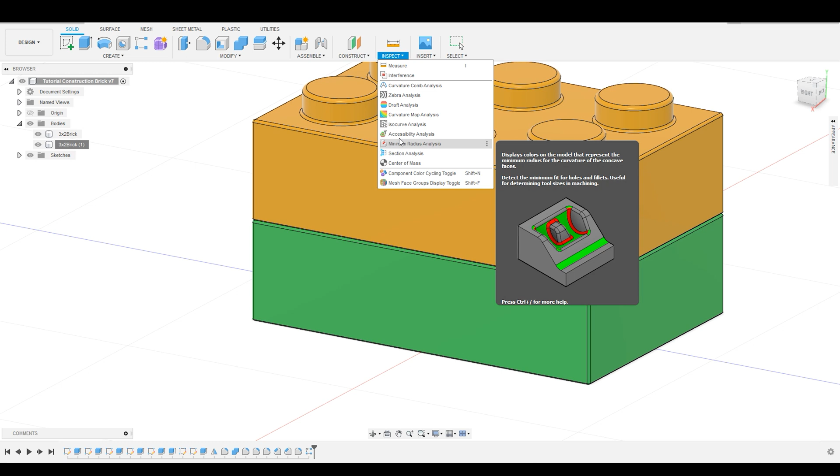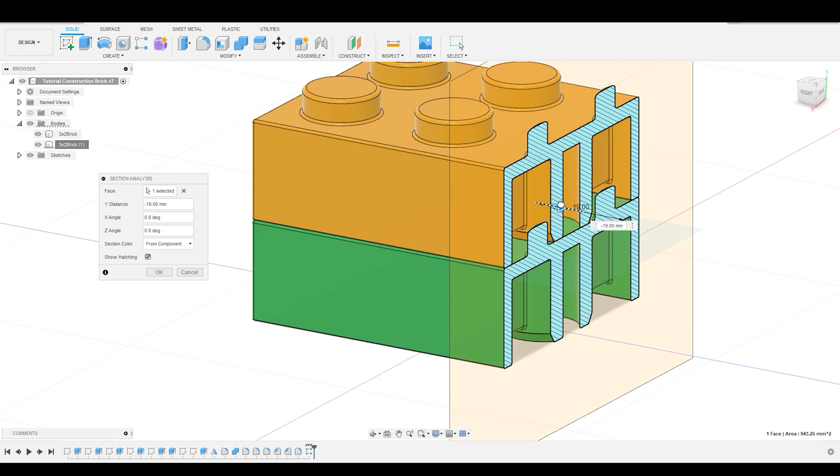Oh, section analysis, sometimes it's called section view. It's called section analysis here, and I was not used to that. Select the plane that you want to basically use as a cutting knife, almost like you were to put this on a table saw, right? And you can basically cut through this object. And you can see as I drag here, let's look at it right about there.

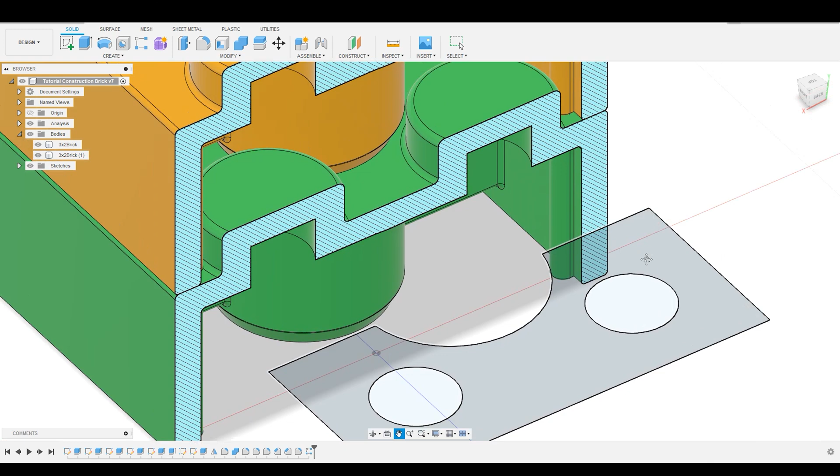It's good, hit OK. And as I zoom in—I've been working in a lot of different CAD programs recently—you can see that I've got my ribs that are getting really, really close to my pegs. And I've got this nice looking internal peg structure that's getting really close to touching up against my pegs there. All right, so you can see we've got this really great construction brick stacking going on.

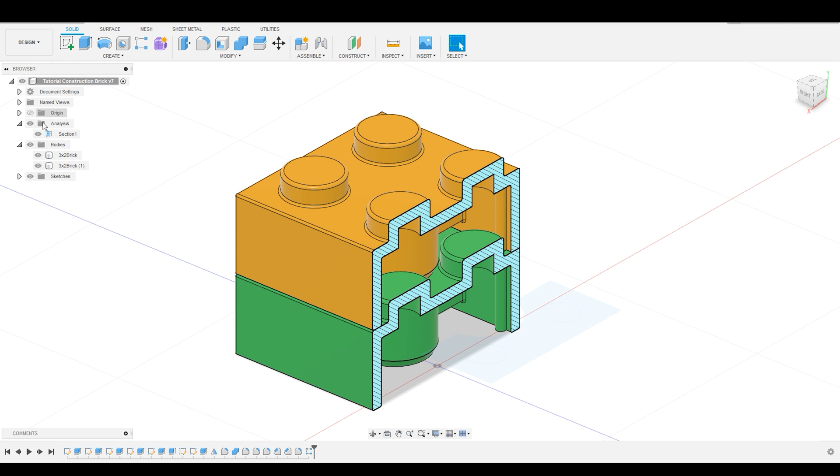I can turn off the section analysis by opening up the analysis tab here, and I can actually go in and either hide it if I want to keep it for later in case I want to make some changes, or I can actually delete it. That's a really cool feature. That's really nice that you could just suppress that. That's really, really awesome.

Okay, and there we have it. You can now marvel in the beauty and the glory of your construction brick that you have created.